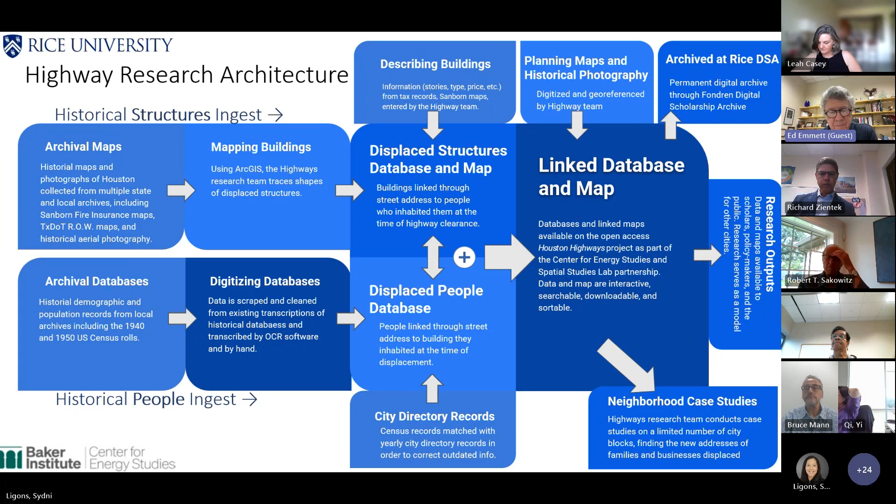So the next slide will show kind of how we did it. There we go. Color coding talks about commercial buildings, residential buildings. This is just an example of how the research team, and we had a team of 6 or 7 people, and the geospatial mapping folks here at Rice could go in and talk about which buildings were actually taken.

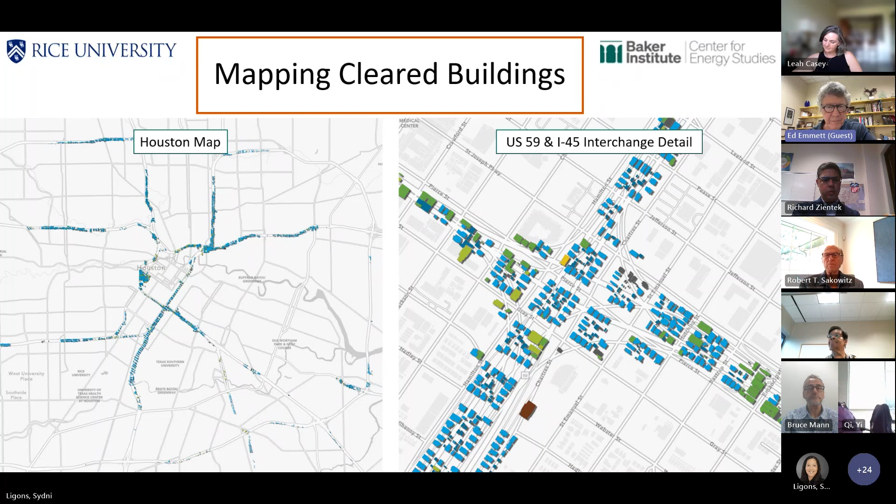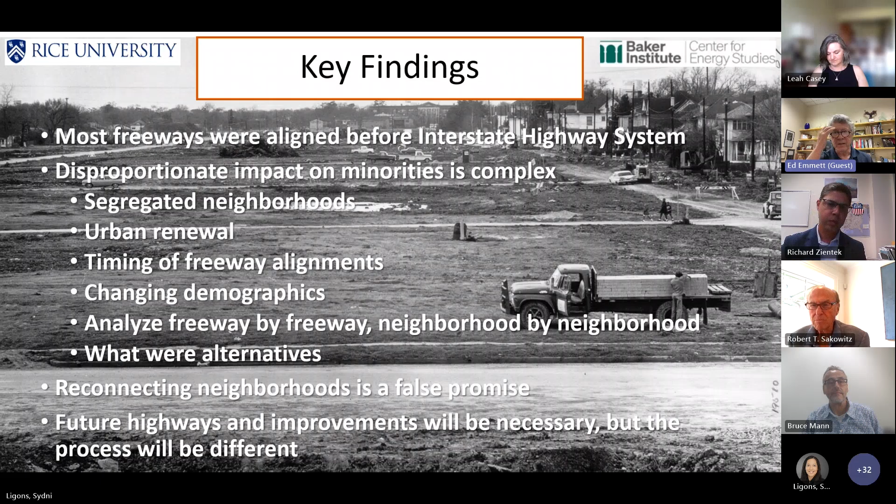In terms of specific surprises, yeah, the Kashmere Gardens thing surprised me a great deal. I'd always known about the McGregor area and how it had changed over the years, but I didn't realize quite how much something like Kashmere Gardens had changed, or even Lindale Park. I mean, any number of them. And of course, the other thing is we're dealing with a Latino population now that just didn't exist back in those days.

Thanks. Does anybody else have any other questions? Cool. It's an easy group.

How long did it take you all to gather all this data? Almost 2.5 years. Oh, okay.

Let's see. Well, if nobody else has any other questions, thank you very much, Judge Emmett. Very enlightening presentation. Obviously, a lot of work behind it, and in 20 minutes, you're probably only scratching the surface. Let me add one more thing real quickly before I drive to San Antonio.

There will be a website that's active that you'll be able to go in, and you'll actually be able to take any section of any freeway and look at it for yourself and see who was displaced, and you'll get the historical documents that tie to that as to why that freeway ran where it did.

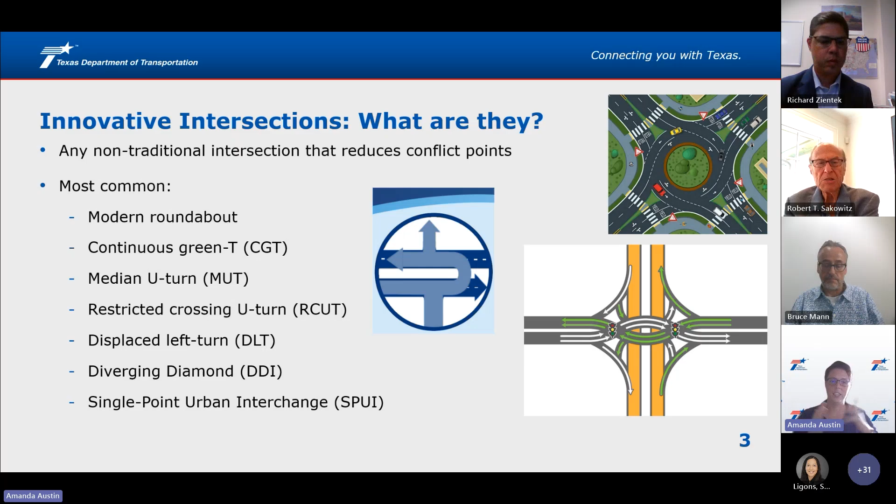I drove through one and didn't realize it until after I'd driven through one. So from the ground, you follow the signage, you follow the road, and then you're through it and you're like, wait, what just happened? So those ones are pretty cool too. I like all these. And then the SPUI, the single point urban interchange. So why are we doing them? Well, when you reduce conflict points, you reduce fatal and serious injury crashes. So it's about safety. For R-cut in particular, a study showed a 40% reduction in injury crashes and a 70% reduction in fatal crashes. An R-cut, real quick, is a restricted crossing U-turn.

Basically, if you think of a median separated highway, like if you get on 290 northwest of the city, past Grand Parkway, Bryan District is looking at putting some R-cuts in right at the edge of Houston District. And what that would do is the minor roads that come onto 290 right now that just have gaps in the median to be able to turn left, you would restrict those left turns. So from the minor road, it's right in, right out. And to make the through or the left movement from the minor road, you have to turn right and then make a U-turn. So that's why it stands for restricted crossing U-turn. So just by reducing the left turns out of the minor road, that can result in a really statistically significant reduction in fatal crashes.

Now, roundabouts, the big red box in the middle, the reason I love these so much is that unlike some of the other innovative intersections, there's a huge speed component for roundabouts. And so lowering the speeds within roundabouts combined with a significant reduction in conflict points reduces fatalities by 90%, which I put in bold, I put in big numbers.

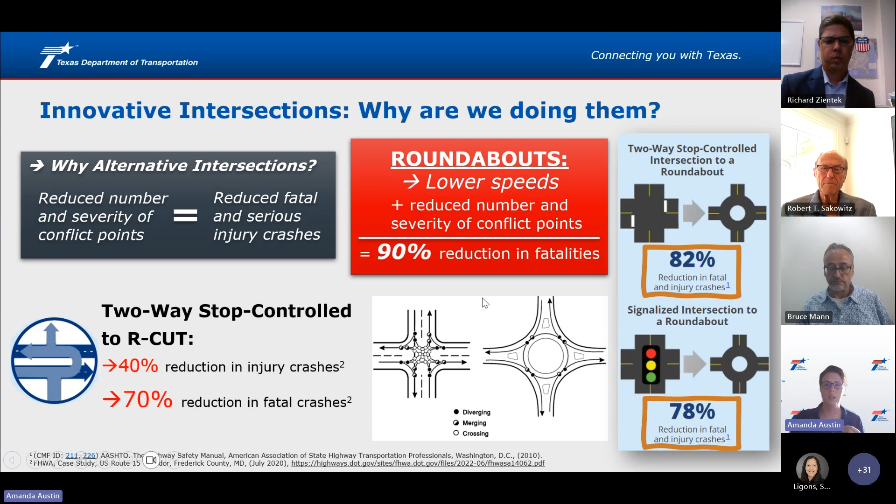Now, because of these safety stats, TxDOT decided to build a program for this. So my job title within Design Division is I am the Roundabout and Alternative Intersection Design Lead, RAID. We took that acronym. We've heard it from Georgia DOT. We really liked how it emphasizes roundabouts because they have the best safety record and they're really applicable in the most situations. You know, for instance, a diverging diamond is applicable in very particular circumstances, but roundabouts can be applied virtually everywhere.

That said, that's the RAID team within Design Division, but we wanted to think bigger than just what we're doing in Design Division. And we know we need to partner with our TxDOT districts because they're the ones implementing the projects. So we devised this little infographic to describe how we're working together. So my RAID team in our Design Division at headquarters is equipping, supporting, and working with our TxDOT districts to implement this overall Innovative Intersections program.

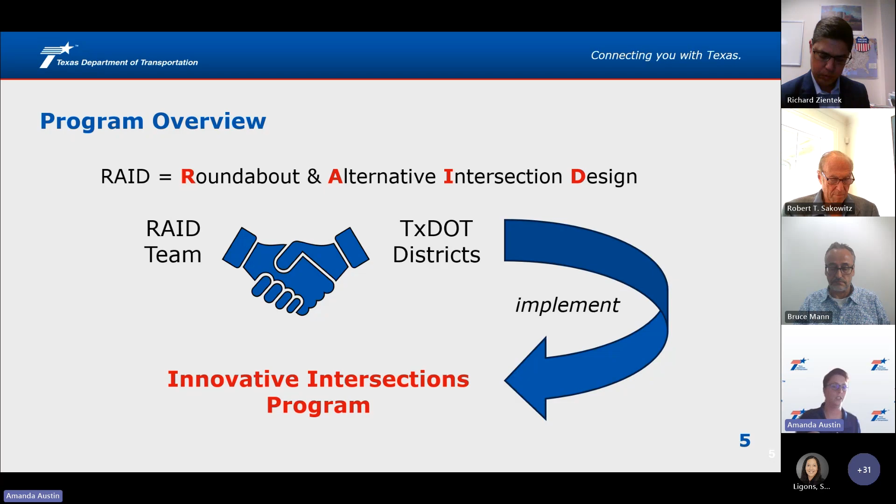So what is this program overall? The vision of this program, as it's been defined, and this program was just stood up about a year ago now, the vision is to decrease fatalities by increasing these types of innovative intersections. It's very simple. Again, it's a safety-driven program. The mission of the RAID team within this program is to advocate for these types of intersections, help to demonstrate, communicate, convey the benefits of these intersections, help to educate.

And educate is internal and external. We've got a lot of educating to do within our department on how to plan for and design and construct and maintain these types of intersections. But we also need to educate the public and our partners. You know, groups like this that we can reach out to and talk to, and we can hear from as well, so we can make sure that these projects are a success.

So education and then support. A big part of what my team is doing is supporting our districts. So if districts are looking at some intersection options, aren't sure which is going to work best, maybe they're not sure exactly how to draw one, we have resources to help with that.

Some key accomplishments to date for our program. We've had a task force stood up since last year. It's internal to TxDOT, but it represents, we've got 14 districts, 14 out of 25 districts represented on the task force. And the task force is the one that came up with this vision and mission and is developing a strategic plan for the program as a whole, and has over the last year been tackling some quick wins.

We got a website up, we've got a database. This is a really great one. We have a database of all the innovative intersections across Texas. There's over 800.

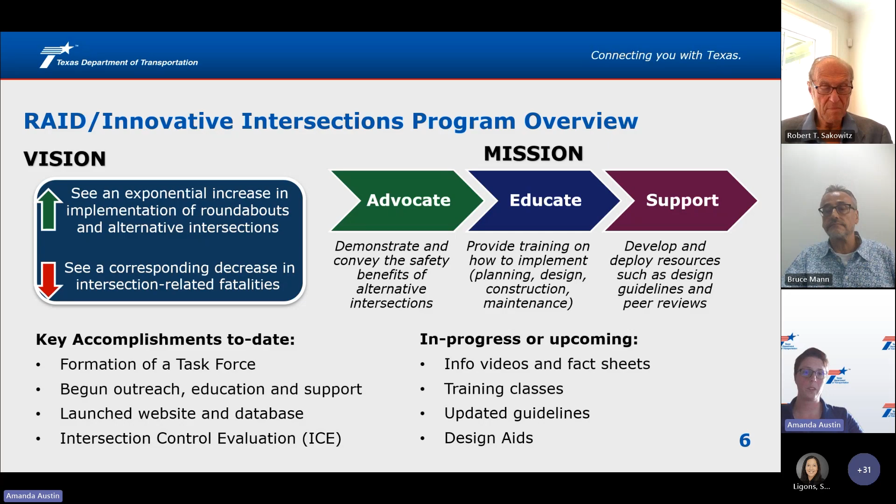The roadway design manual is in the process of being updated and should come out in September. And there's a whole chapter 14 that will be about innovative intersections. So keep an eye out for that. And we're going to supplement the RDM with design aids as well. All right, so that's my program. That's how we're doing it, safety-based. Now let's talk about how this is important to all of you guys.

Freight considerations for innovative intersections. Big picture, most innovative intersections can accommodate trucks and oversized overweight as designed. Diverging diamonds, you're designing your right turns. If you design it for the biggest vehicle you've got, then you can do it. The diverging diamonds, as you can see on the top left here, have pretty gradual turns. It reduces your traffic signal phasing, which can be a big operational benefit.

But some of these innovative intersections will need some extra attention to accommodate truck swept path. So the bottom picture is an R-cut. So that's that example I was talking about. It's a good picture of it. You might be able to see my mouse, but if you have a minor road, you're right in, right out. You turn right, you have to cross a lane and then get into the U-turn. And then we've got these small truck lanes here.

Now, you have to pay really close attention to the U-turn alternatives, median U-turns and R-cuts, because whenever you provide U-turns for trucks, you have to think about your acceleration and deceleration lanes. Do they have the space to decelerate without holding up the free flow traffic? Do they have space to accelerate? I'm actually going to go back a slide.

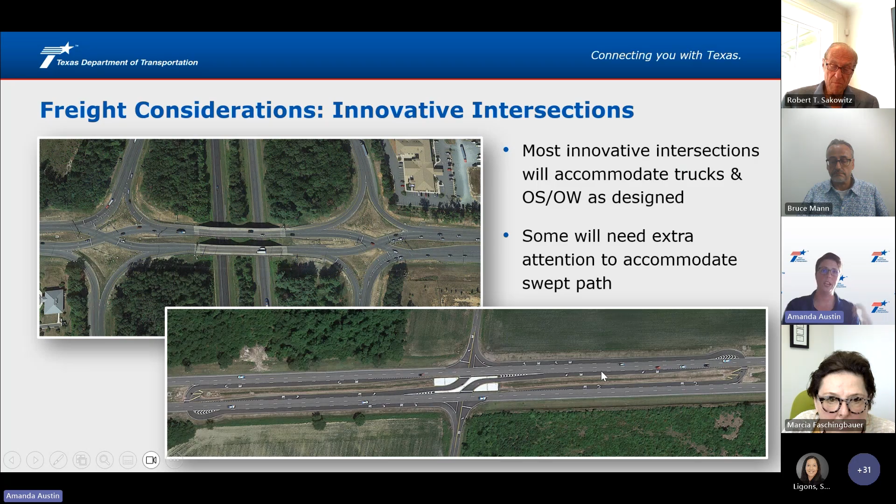If you look closely, if you pull the U-turn here, it puts you into a right turn lane. What's nice about that is that you don't have to stop and look way over your shoulder to try to merge right away. You've got some time to get up to speed, but if you aren't turning right, you need to change a lane to get over. So there's a lot of different ways to do that.

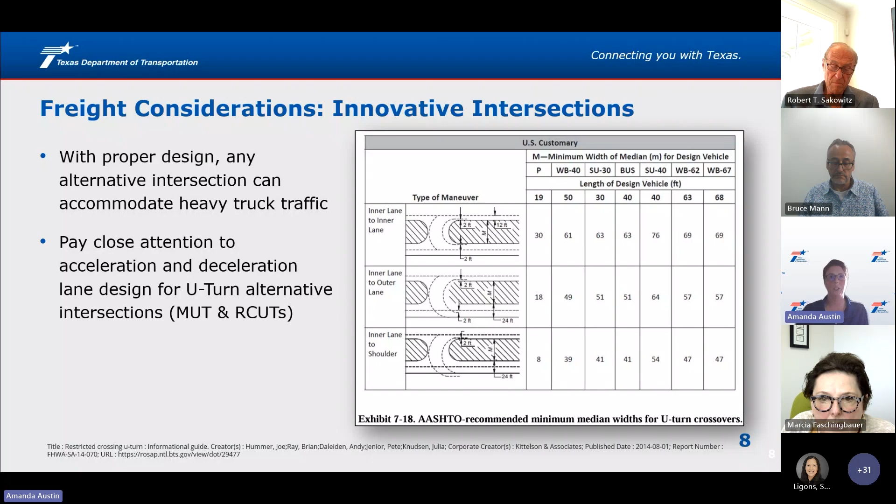Now, roundabouts in particular, what I love about them is they actually provide advantages for trucks because of the U-turn situation and avoiding full stops. Let me talk for a second on U-turns. A really powerful combination for a corridor is medians to provide safety from head-on collisions, combined with R-cuts at the most minor roads to create right in, right out situations, but to avoid the trouble that can come from U-turns and trucks and high-speed U-turns and that sort of thing.

You put roundabouts at key locations along the corridor. And those three things combined create a really powerful safety package, because you're preventing head-on collisions, you're preventing left turn collisions, and you're providing safe U-turn environments at the roundabouts. So here's a picture of a modern multi-lane roundabout, and you can see that trucks can navigate the roundabout.

I'm going to show you a video a little bit later that I think will help convey that roundabouts work very well for trucks for U-turns. Everybody's going the same speed, so a truck driver doesn't have to worry about going very, very slow on a high-speed highway when they've just pulled a U-turn.

Now, roundabouts do require strategic truck aprons, and you've got to know the design and check vehicles. Just like any other alternative intersection, you have to know what type of vehicles are navigating your roundabout. And one little tidbit for the trucking community that we're talking with them about, the latest roundabout design guidance from the Federal Highway Administration recommends straddle lane design, which is what you see in this picture here, which is when you have more than one lane, the truck claims both lanes.

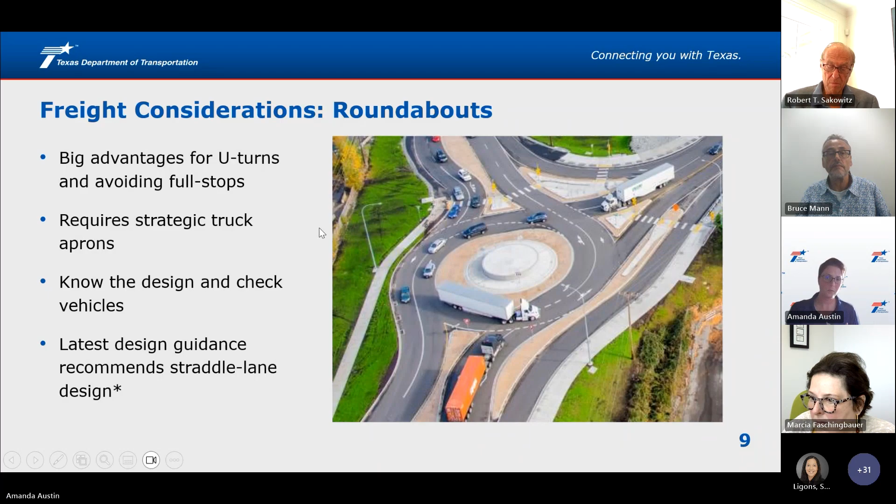So now that's kind of the high level for freight considerations. Oh, and I don't want to forget about rail. I know Tyson's still on the line. So some rail considerations with roundabouts. This one is very interesting. I have an ongoing call with some folks who are also on the ITE roundabout and grade crossing committee.

Every roundabout and railroad situation is unique. We have a few in Texas where it's very, very close. Through Daingerfield, there's a railroad track right through the middle. It's not this picture. And then I don't know if you noticed on my cover slide, there's a brand new roundabout in Round Rock with the railroad going right through the middle and an overpass over the top, and it's working great. But things you need to consider.

With your roundabout, you have to consider both your vehicle traffic and your train traffic. So if you have a railroad that's crossing one leg of a roundabout, you have to think about when a train is coming through there, where are all the vehicles going to go? How long is the train going to sit there? Is it near a yard? Are they going to stop? Are they going to back up? How long is it going to block that crossing? So you have to consider all those options. It's a very heavy engineering judgment type of situation.

You got to think about your gate placement, train speeds, frequency, and then where the crossing is located. Is it through the middle? Is it across one leg? Is it across 2 legs? How far from the roundabout is it? Is there space to queue in between the roundabout and the rail? Will the queue length get back into the roundabout? From the other side of the roundabout, can you see the train and stop ahead of time?

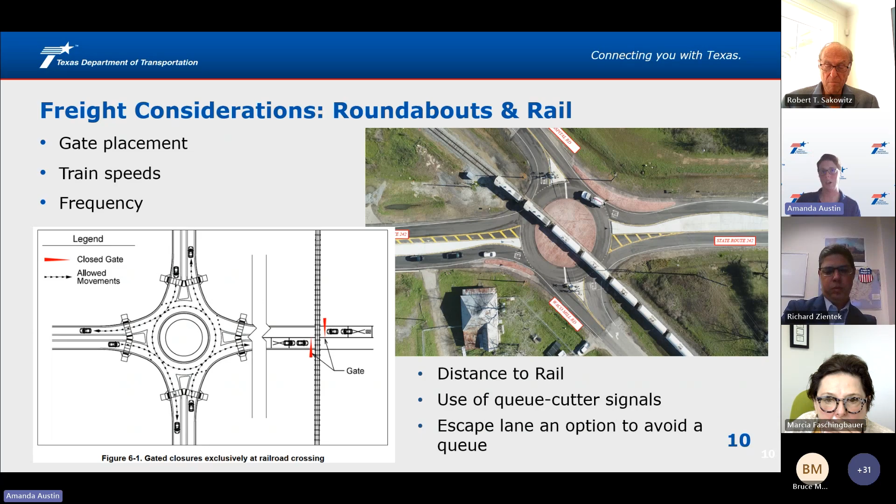There's basically a lot of questions, and we're working with ITE to come up with some guidance. Right now, there's not a ton of guidance about what to do with roundabouts and rail. And I would say, thinking critically, it can work sometimes, and it may not work other times. So you just have to look very closely.

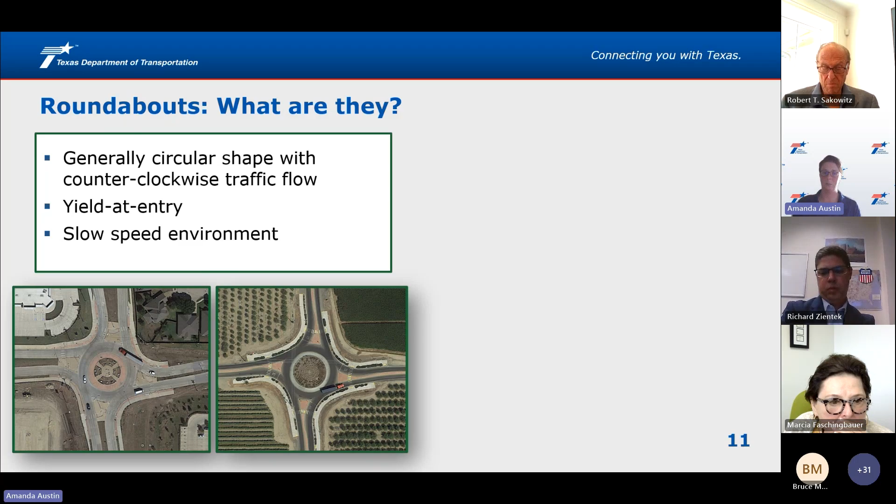And these also are very large. Like you could theoretically circulate these circles at a higher speed, more than 30 miles per hour. So they don't really fit the definition of a modern roundabout. I also throw in some East Coast style circles, or some I've seen in Texas where they didn't really maintain the striping, or it's just kind of open-ended.

If you have multiple lanes going into a traffic circle, I should say, and you have to change lanes within the circle, I would not consider that a modern roundabout. Modern roundabouts should be designed so that, typical to a traditional signal, you choose your lane ahead of the intersection and you follow that lane through the intersection.

We know that at a signal, you should not be in the middle of an intersection changing lanes from the left turn lane to try to go through. So it's the same with modern roundabouts. You want to pick your lane ahead of time, follow it all the way through. And if there's a traffic circle where you can change lanes, it's not really a modern roundabout.

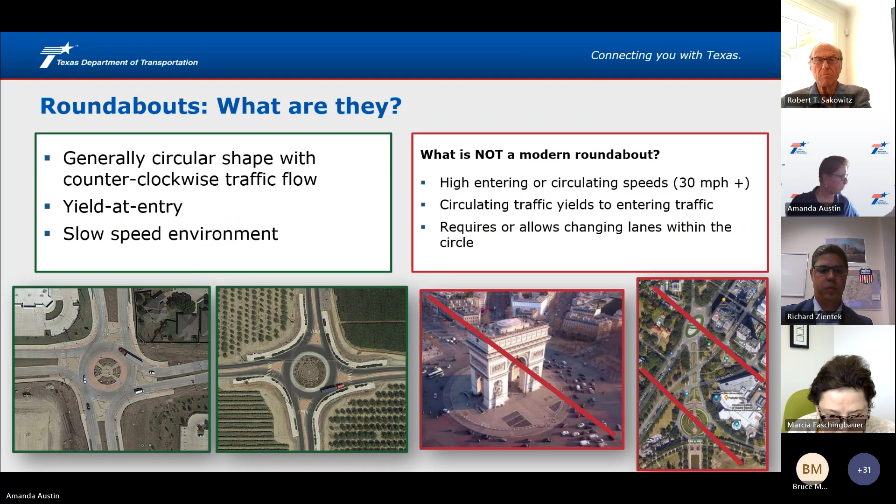But on our Texas state facilities, it's very possible that this through movement could be 45, 50, 55 miles per hour. Plus, when I drive to Austin nearly every week, there's locations where this could be much higher than 55 miles per hour. That, of course, is going to be a very, very serious collision.

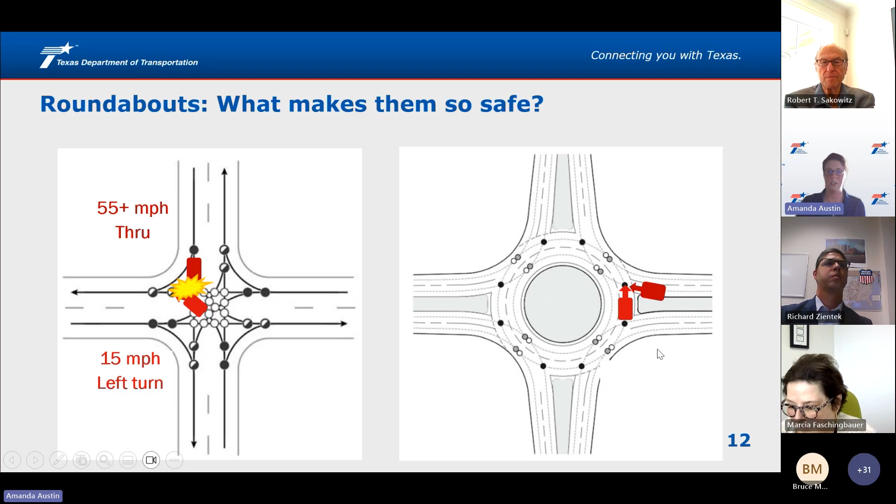Now, a roundabout, a multi-lane roundabout, you do have a potential of this crossing type conflict. You can see by the dots here, but the speeds are different. If this vehicle is circulating the roundabout at about 15 miles per hour, which is typical, the entering vehicle here in modern roundabout design should not be going more than 28 miles per hour.

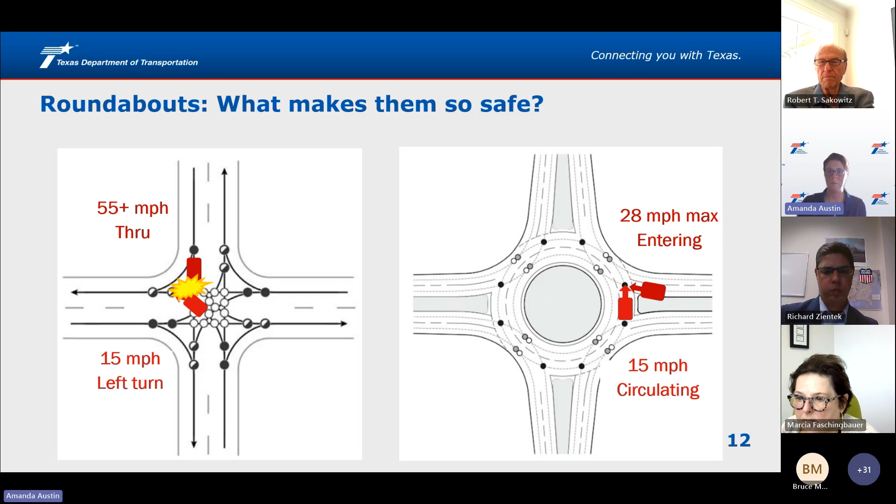Our latest roundabout design guidelines say 30 miles per hour max for multi-lane. Our new roadway design manual is going to drop that down even more to 28 miles per hour max. So geometrically, our roundabouts should be designed so that you cannot physically enter the roundabout at more than 28 miles per hour. Now that collision is going to be a lot less severe.

And so that's where roundabouts get their incredible safety record. You have less conflict points, and the conflict points you do have are happening at low speeds. So even if roundabouts do have crashes sometimes, you're likely going to all make it home at the end of the day.

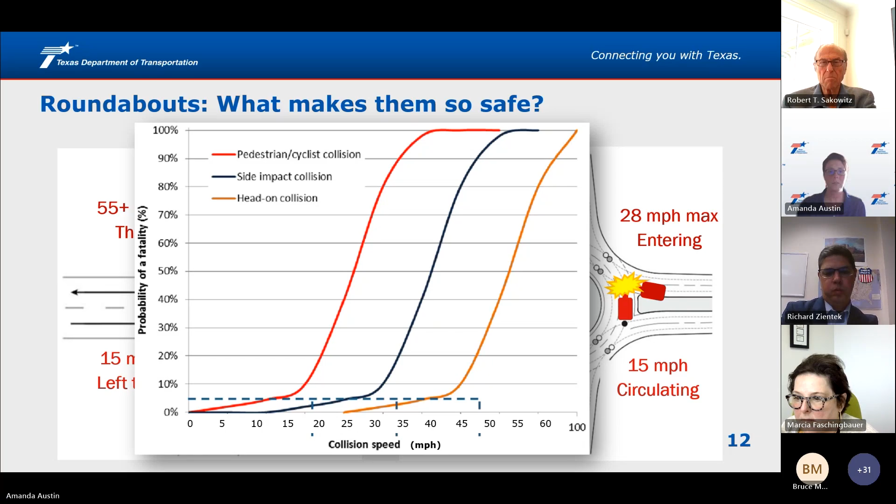The last thing I always hear about roundabout safety is drivers. Drivers are the problem, like nobody knows how to drive them. But those reduced conflict points, the low speeds, make it very forgiving for driver error if you do make a mistake. I hear all the time, I don't have a problem with roundabouts. It's all the other drivers that don't know what they're doing. I always say, well, at least y'all make it home at the end of the day.

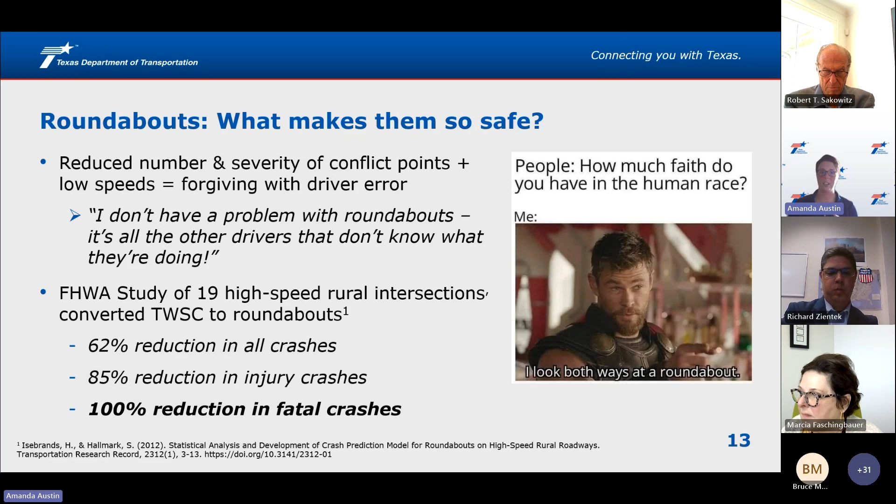Even in high-speed locations, this still applies. With good design, you can still get vehicles on a high-speed roadway, even 70 miles per hour plus, to slow down to 20 to 25 miles per hour entering. An FHWA study of 19 high-speed rural intersection conversions showed a 100% reduction in fatal crashes. It's a really incredible safety record.

And I know TxDOT Houston District made a valiant effort putting generators out at dozens of intersections, but we can't cover them all. It's very simple. A roundabout continues to work in a power outage. Because of that, Florida is actually installing roundabouts in so many locations. Florida's roundabout construction has taken off, and it's because they realize how they're resilient.

Operationally, roundabouts are more efficient. The yield on entry better utilizes intersection space and reduces overall intersection delay. You don't have all red time. If you're sitting at a light next time and the other direction is still green and all the cars have flushed out and nobody's using the intersection space, you can think to yourself, man, if I was in a roundabout, I could go right now. So that also means reduced fuel consumption, less emissions. It's really a win for everybody.

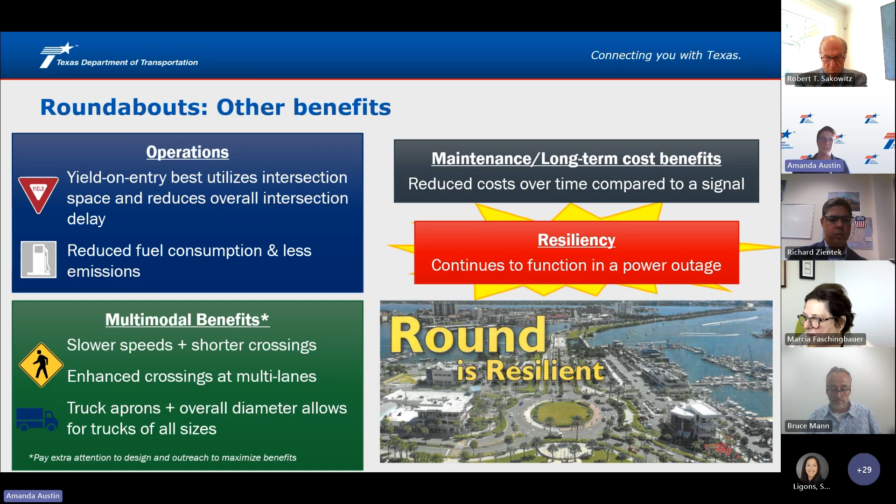They are safer for pedestrians because of the slower speeds. And enhanced crossings at multi-lanes can also help those with low visibility or vision impairment. And then trucks. We talked a little bit about how roundabouts can have an advantage for trucks. That comes down to good design with truck aprons, your diameter, your approach geometry, etc. So let's dig in a little bit. This is my last topic before the end here.

Accommodating oversized, overweight trucks. With proper design paired with your truck aprons, you can really accommodate everything. An example on the right here, this is a small town in Washington State that has a major port and oil refineries on the other side of town. Twice a year, they have these big equipments come through on a self-propelled modular transport, like in the picture below. They do it at night.

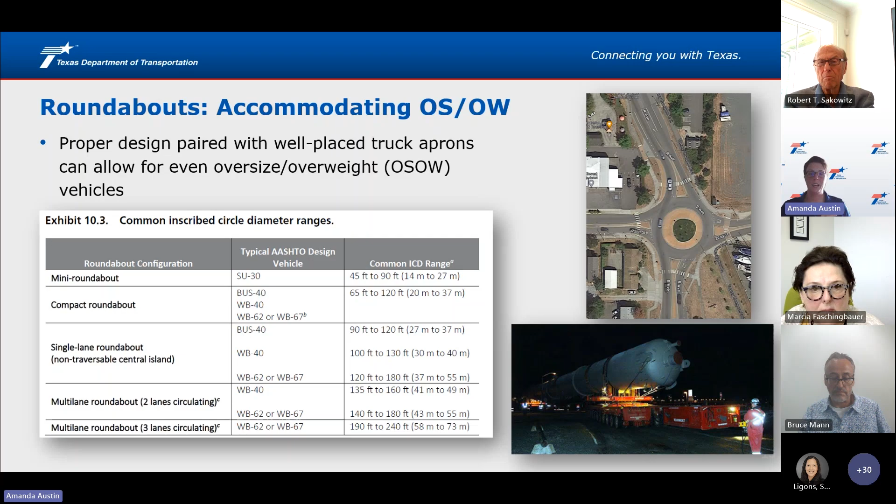They have to shut down the whole town, take down a bunch of signals on span wires, but we designed the roundabout for it to essentially go straight through, and it was no problem when it went straight through. So again, this is a pretty small roundabout. That's only 110 feet in diameter. So with good design, you can pretty much accommodate everything.

Another example I have is a state route, again in Washington State, a single lane roundabout, 150 feet in diameter, was put on a truck route. It was constructed as a truck route because Granite Falls was having dump and trailer trucks come through their town. I think it was 2 every minute on average. And so this poor little small town was just buried in dump trucks, and they wanted a bypass.

Under construction, we had this lowboy driver approach us and said, "Hey, I come through here twice a year bringing equipment in and out of the quarries. Do you think I'll be able to fit through the roundabouts?" And we went, "Ooh." We did a whole presentation at the time on lessons learned about finding your oversized, overweight vehicles during design and not during construction.

But he met us out at one of the quarries. This is where the picture was taken. It's 112 feet long, 12 axles. And we measured him turning in circles so we could model the truck appropriately. We ended up doing one change order to widen an exterior truck apron. And then it came time to try it out. So I've got a video real quick that I can show.

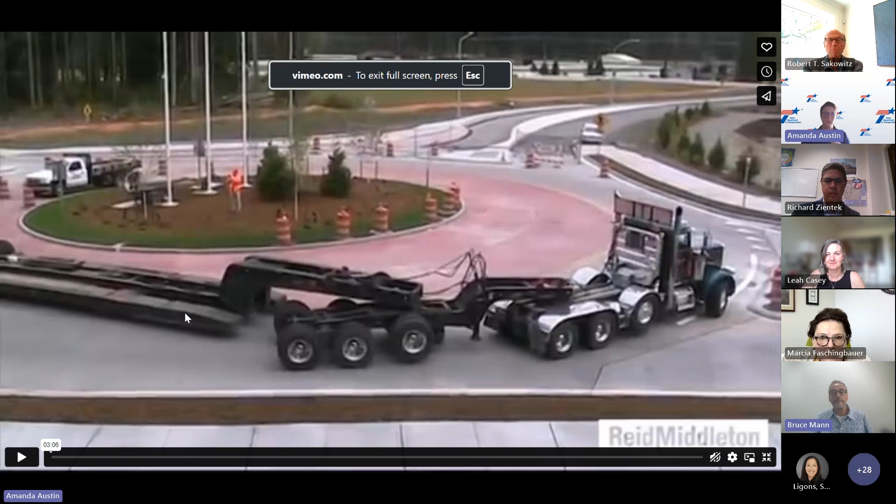Can everybody see the video screen right now? Okay. Yeah. Seeing some nodding. Okay. You don't have to worry about sound.

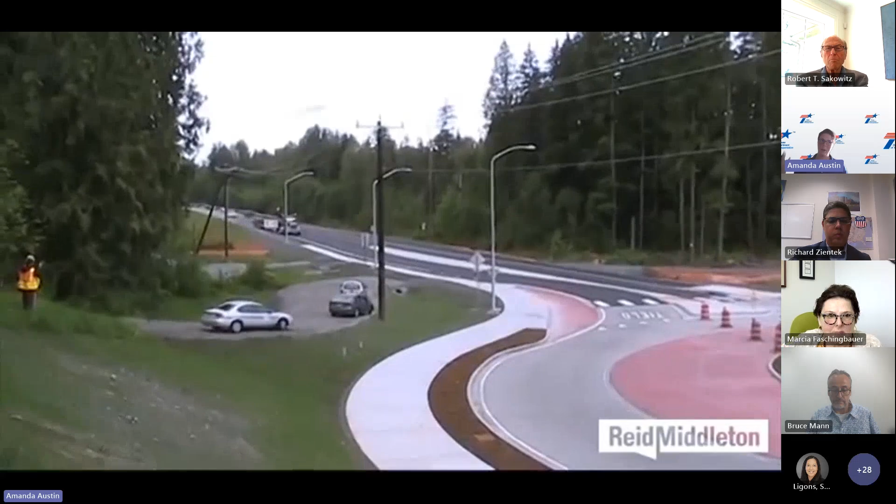So what happened on the day of trying this truck out is the full alternate route hadn't opened yet. And so the truck needed to be able to pull a U-turn. And I want you to think back to that picture of a 112-foot truck. And I want you to see if you can think of any traditional signalized intersection where a 112-foot truck could pull a U-turn. And I bet you can't think of any because we don't design them for that.

But in this situation, we gave it a try. We did modeling ahead of time. I was the one that did the modeling. That was actually a lot of fun. I was the one shooting this video. I think at this point, I started holding my breath to see if he would make it.

So this red concrete here is a truck apron. It is meant for trucks to drive over. It had a 2-inch beveled curb, and it was colored to discourage regular vehicles, and it pretty much always works.

People don't really want to drive over a 2-inch beveled curb in their passenger vehicle, but it's usually fine for trucks. Along the outer edge, you can see what his cab is hugging. That is a vertical curb. And so we did design it so that the truck would not have to drive over any vertical curbs. He would only track over truck aprons.

And so here he is, you can see in this route, it was a 3-legged roundabout, and he couldn't make the exit onto the new route, so we had to do the U-turn. I can't even fit the truck in the whole video at this point. But at this point, I usually can't take it any longer. And anybody who's watching this video, I tell them that they don't hit the vertical curb. He makes it through. He tracks through on that truck apron just the way that he's supposed to.

I believe we went out and measured. I think he drove through a puddle, and so we could see his tire tracks on the truck apron. And there was about 12 to 18 inches between that booster at the very end, his tires, and the vertical curb on the inside where you see the barrels.

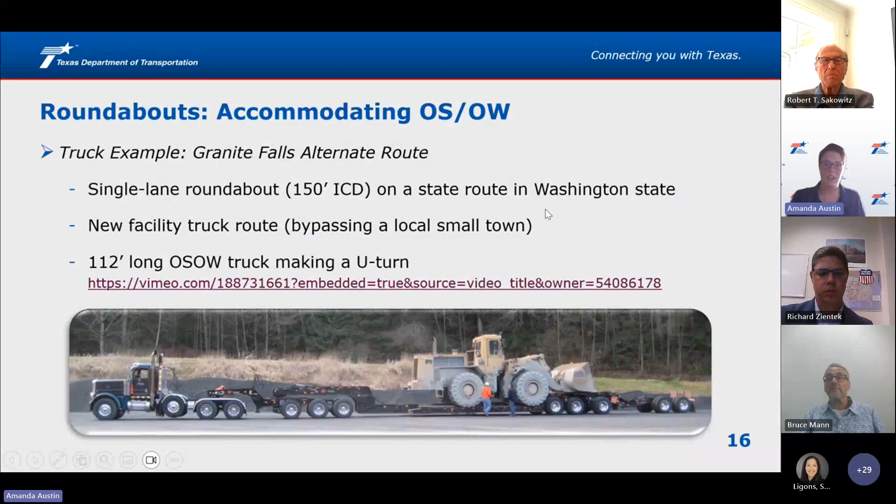Here's an example of that dump and trailer that we designed it for, and they go through easy peasy. He doesn't even need to drive the front of his truck over the truck apron. It's just his trailer tracks over it. So I think they say a picture speaks 1,000 words, but a video speaks 1,000,000. So I think this particular video is a very powerful tool to convey roundabouts and how good design can accommodate just about everything. Next steps and takeaways.

I think I'm a little bit over time here, but thank you for bearing with me. We're looking for ways to partner. Greater Houston Freight Committee, you guys are an important stakeholder for our program. We want to hear how we can make our designs and our program better. We're looking to reach out. We are working with the Texas Trucking Association to talk with truckers. I had an excellent opportunity to talk on the Road Dog Trucking radio show yesterday. And I think they even want me back. So we're looking for ways.

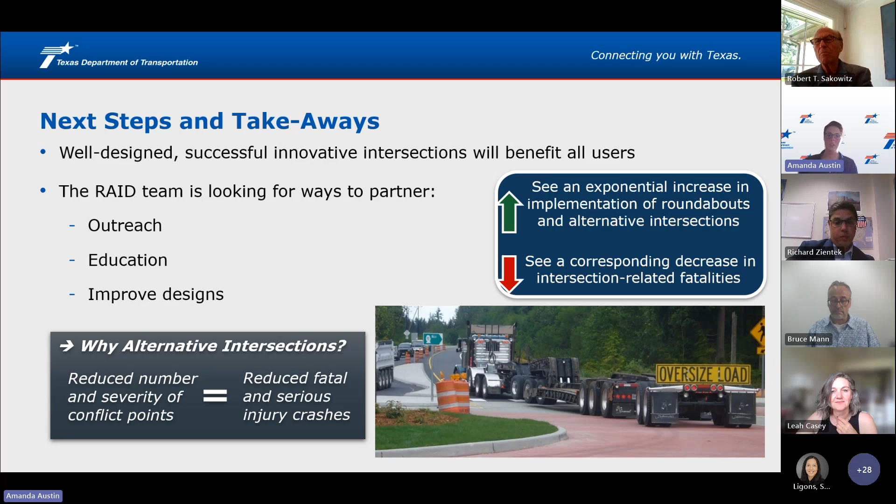And if you know of ways within your realm of work that we can come talk, we can advocate, educate, or support, we would love to partner with you. And if I can leave you with anything, just remember that innovative intersections reduce fatalities, roundabouts save lives, and that's what we're working towards. With that, I can leave it on this slide for questions and just let this video run in the background so you can see.

I like watching roundabout videos. I find them like a Zen garden, just watching the traffic flow, but this one has a lot of truck traffic, so that would be a good one.

All right, I see a hand raised. I think there's also stuff in the chat. I'm going to go with the hand raised. I think Tyson, is that you? Good afternoon, Amanda. Good to see you. Good to see you too.

So what I do want to qualify for those that are listening here, that if there is a planned roundabout, UP does have specific standards to stay several hundred feet at least, I don't have the specifications in front of me, away from the rail right of way. UP doesn't view the roundabouts next to our right of way with our train operations as being the safest operation there. So when we're working with communities, we do ask that they stay away from our operating right of way there.

I just want to qualify that those photos that Amanda did show in there with railroad right through the middle of them would not be something that would be permissible in today's standards. Is that fair, Amanda? That is fair. I do know UPRR has that standard. And the cover slide that I showed is not UPRR, it's a sideline.

One of the things ITE is working on is we'd really like to change that conversation with UPRR, but we know it's going to take time. So that's a very good point. If you're doing one now, coordinate closely with UPRR and look at that distance very closely. I hope in the future that we can come to some standards that meet everyone's needs. Yes. Yep. Meets everyone's needs. Thank you. I just wanted to make that qualification in case there are certain agencies that would come to us that might be a surprise conversation then.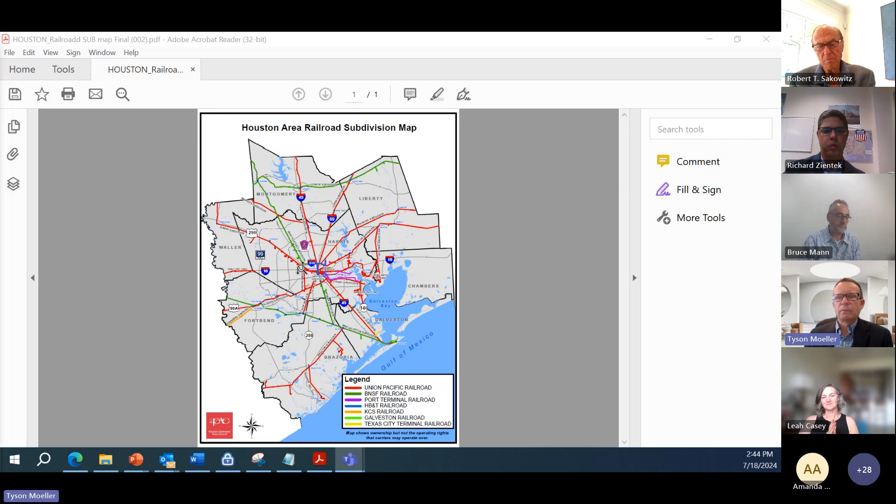And so as you zoom in a little bit, I think something to keep in mind from a freight standpoint is that while the rail facilities support much of the local industry, understand that all of the growth that happens in Freeport, Corpus Christi, Brownsville, all of that freight that originates or needs to go to those ports has to go through this Houston complex. By definition and by our operations, that's what's happening here. So when you see freight trains, they're not all just originating or destined to the complex here, but there's much of it that's going through. So the Houston complex for us is very important for the growth of all of those regions and ports as well. So that's important to understand why the railroads are so important here.

And so with that being said, when I think about Texas in general and Houston primarily, the majority of any of the growth from an industry standpoint within our 23 state franchise, the majority of it is happening here in Texas. And a lot of that's happening right here in Houston. And so what that translates for the general public is that means good paying jobs that are out there, right? And so that kind of gives the relevance of the railroads there.

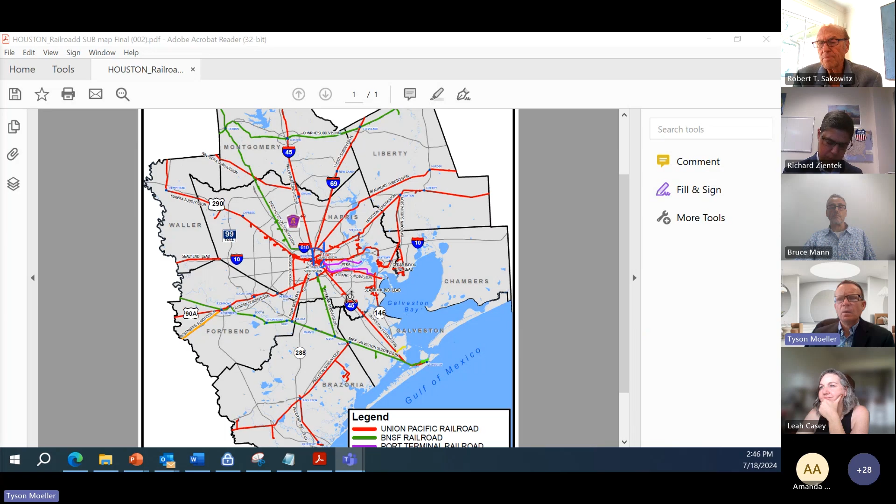And so when I look at this map here, the areas that Union Pacific has put significant infrastructure into would be into our Englewood Yard. And our Englewood Yard would be right here where you see the East Belt here, but it runs east-west. And that's our primary classification yard. If something happens in that classification yard and it's not working well, they can feel those operational effects as far as LA or Chicago. And so, Bruce, Catherine, myself, we are all part of a group called The Heart, and that's Houston Area Rail Transformation Group. And that's part of where we got our branding from, was because this is really the heartbeat of much of UP's operations.

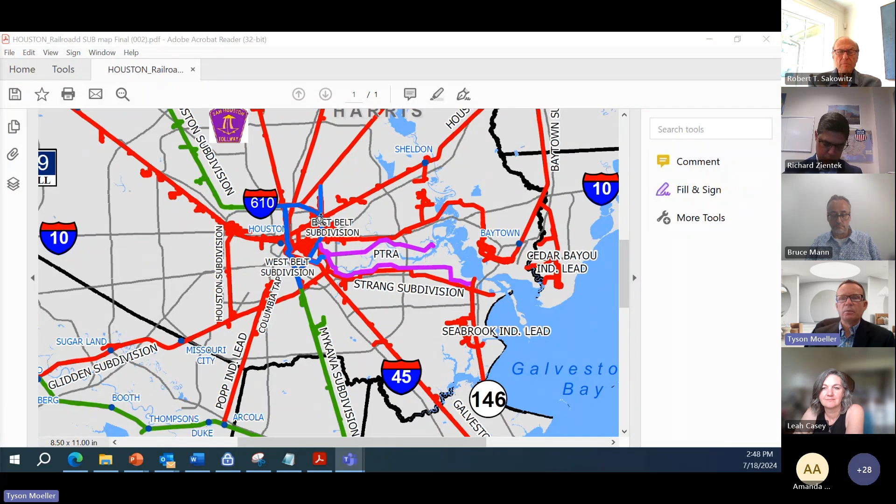So when I think about close to $1 billion spent, we've spent significant dollars in that Englewood yard, and that helps process all of the cars, like I said, coming from Brownsville area, New Orleans, as well as all of the industry growth that's happening here in the Houston complex. Now, another area that I'll point out that we've put significant investments into is what we call our Baytown branch subdivision over here. As many of you know, from a freight standpoint, there is a lot of growth happening in the Chambers County and Liberty County area. And so what that requires is significant investments, not only by industries to have rail capabilities, but rail as well, where we're looking to add additional double track. And you also see TxDOT putting a lot of investments in there.

I think about the Highway 99 tollway over there that's helping with some of that growth. But we're collaborating with TxDOT on various grade separation projects like Highway 90, right up here in Dayton, that runs right through this Baytown Sub connection. And that's been an at-grade forever. TxDOT has the funding. They should be at 100% design later this year. And that will be a new grade separation going into place, or construction should start in 2025 there.

And that is a project that has been out there for probably 20-some years. It takes a long time, one, for a project to develop, and then two, to find the right funding for it. So I just use that as an example where UP has worked with the county, TxDOT, and other agencies to put a project like that together.

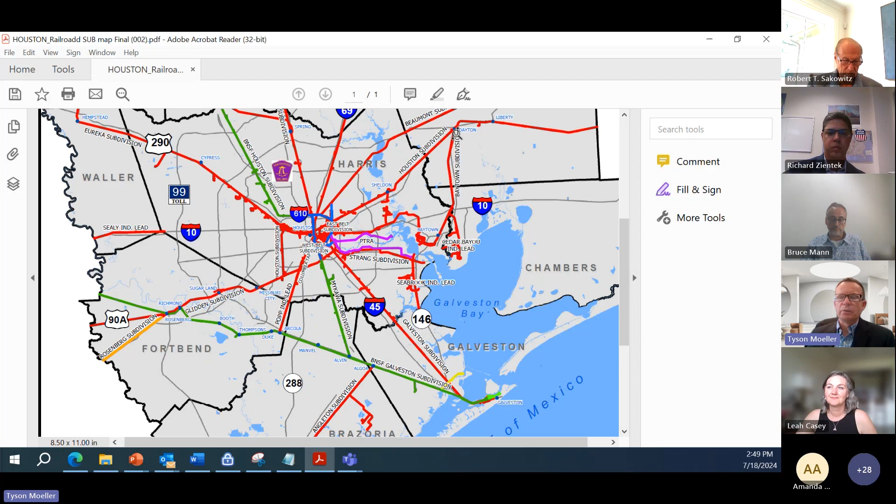And so when I think about investments and resiliency, there's other things that we've worked with TxDOT on. We just had the hurricane that came through. Understand that we depend on the local power supplies. When the local power supplies go out, all of our signal systems go down. And so Richard, who's on the call here, works very closely with the local power companies to make sure that, one, any downed power lines get removed, but also that we get power back to our signal system, lights and gates so that we can operate and the general public is safe there.

From a resiliency standpoint, we've worked with TxDOT for alternate fuel cell capabilities. As part of the storm, when all the power goes out, we don't just sit and wait. We have to go out and deploy our own generators. And so when this storm hit, it was well over 200-plus generators that were put out in our system in order to keep our network alive. Richard, I might have you jump in there.

Yeah, definitely, Tyson. When I started the call, I was thanking everybody for understanding if we had slow-moving trains moving through at one point. I know we had to have flaggers. I think it was over 500 generators that were out. We got that number down over the last 2 or 3 days to over 100, and continue to see that number decline as power is coming back up. But you're right, that is a momentous effort of keeping our signal system going.

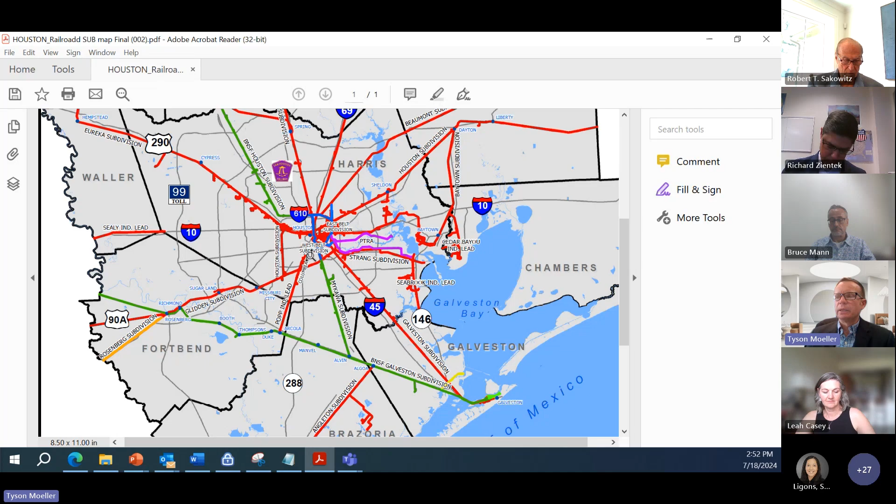And when I think about resiliency, a lot of our rail network has typically been single main line. So some of the things we work on on our own is to put double track in there. When I think about single main lines, I think of areas like the east end of Houston, or some of our communities along our Glidden Sub, like Missouri City, Sugar Land, Rosenberg, where we have a lot of single track. Some of our capacity projects help when we double track, because you can have trains moving both directions at one time versus having a train stop while another train runs around the other one.

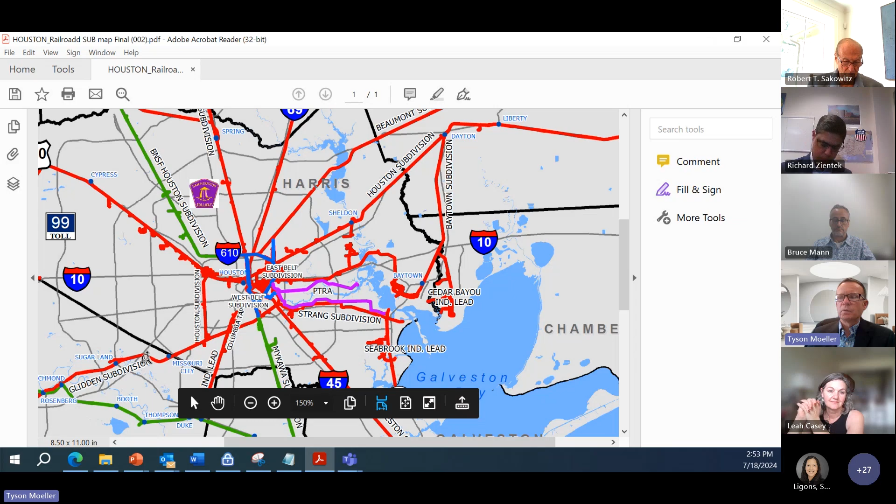This is again where we're working with multiple agencies, TxDOT taking the lead on the studies and funding much of those, with active participation from county, city, and other agencies to see what kind of programs can be put together, one, for grade separations, or two, helping the railroads be more resilient and add additional double track. The Glidden Sub study is kicking off this summer. We've already done a phase 2. I don't believe it's been published yet, but that will really focus on this east end, where we know there are blocked crossings, and we're looking for what those solutions can be.

Catherine's on here, part of the H-GAC group. She's been successful in securing the funding on the West Belt here for several grade separations on Commerce and Navigation, and then also for York and Sampson for those 2 grade separations.

So those are projects that are now fully funded, that still need to go through the design process. The design process will take a couple of years, and then those will go to construction. The other grade separation that is being designed right now by TxDOT for multiple agency benefit would be the Griggs-Long-Mykawa grade separation. And that is right at where our Harrisburg sub connects with our West Belt and the BNSF's Mykawa sub.

Now, this is a very complicated grade separation, because you have city roadways, you have a future Metro capability that they would like to be able to get to the airport through here, and then you have a TxDOT project that's putting a new highway in there. So this is going to be basically 4 levels, with the freight railroads at the base level. You'll have Metro above the freight railroads, city streets above Metro, and then TxDOT at the very top.